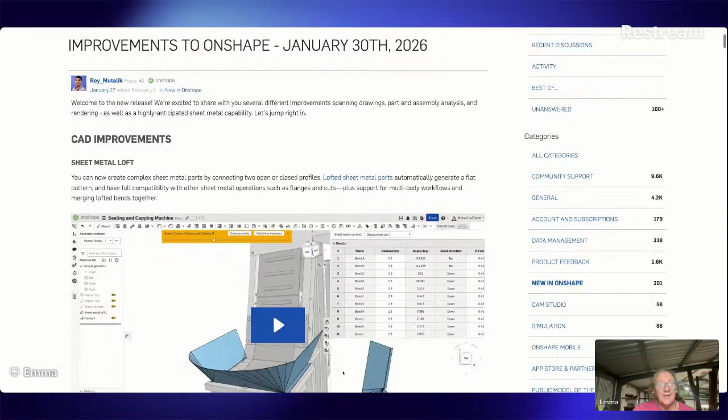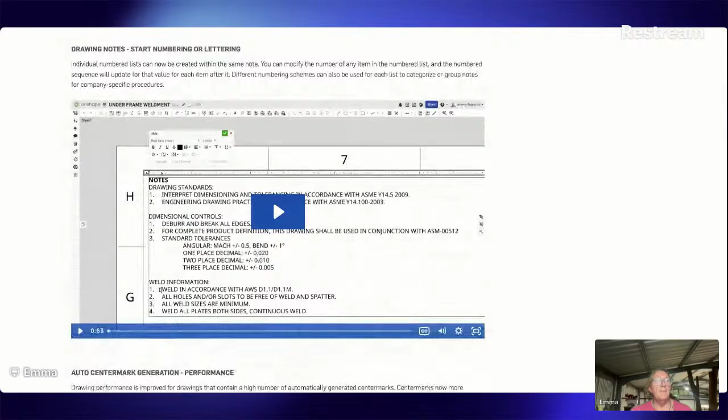Surface deviation with the deviation analysis tool. That's full paid, as is reflection analysis. Some graphics preferences. Touch input for a touch screen. Is your new screen a touch screen, James? Numbered lists in notes. Onshape for government. Render studio improvements is huge.

At some point, I'd like to get to the point that I can actually afford a full subscription for a little while, and try mess with some of these things, rendering, etc. Someone says, blinded by sheet metal loft, failed to see touch input on devices like a Surface tablet. That's exactly right.

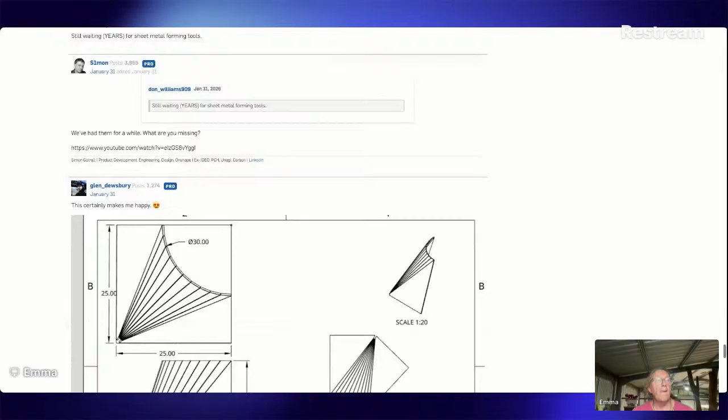But absolutely lofted sheet metal is a big one. So that's a big one that's been asked for a long time. We'll have a look at that. Might have a bit of a mess. What else is happening? Anyway.

Let's go back to Onshape. Here we are. Now, I've been messing, as you know, with the donation box pretty heavy. I'm going to do some more of that. I've got some ideas. I don't know whether I'm going to get into that tonight or not. Some of these projects were getting finished, which is great. Steve's Marshall big ends, they're on the bench there out the door. This part here for Phil's Portable really needs some work. Williams Lane engine is sort of starting to come together. That's something that we're going to be working on a bit more in the future.

This low angle jack plane, we're going to see a bit more of that too. I'm not sure about the Bolton number 12 beam engine or the Muncaster vertical. I will get in and do some more on them at some point. It hasn't happened. And projects for 1919 keep going. Mark's rod guides are finished and delivered. I think they came up pretty nice. So I can't wait to see them machined and in place. It'd be really good.

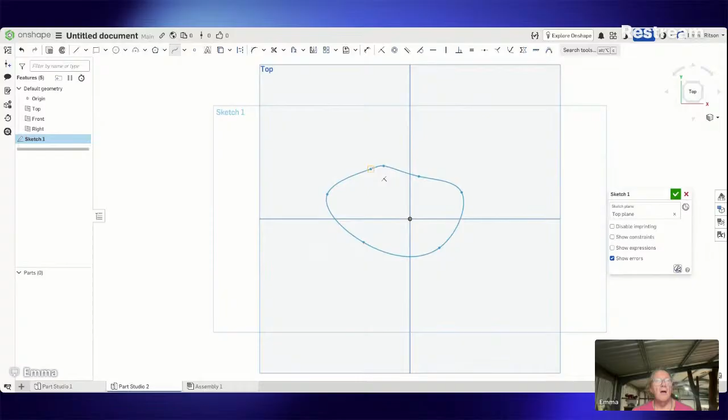On this top, we're going to make a shape. A sketch on here. Let's do something a bit fancy. We'll have a look at this sheet metal loft. Let's try with a spline. So we've got a shape like that. If we finalise that sketch, the easiest way is probably to put an offset plane to this one that we've just drawn on. We'll make this 100 mil. We'll offset it down rather than up. How's that? We've got another plane there like that, see?

If we do a sketch on this plane, and then we press N for normal, we can do something similar. Let's make it something fun.

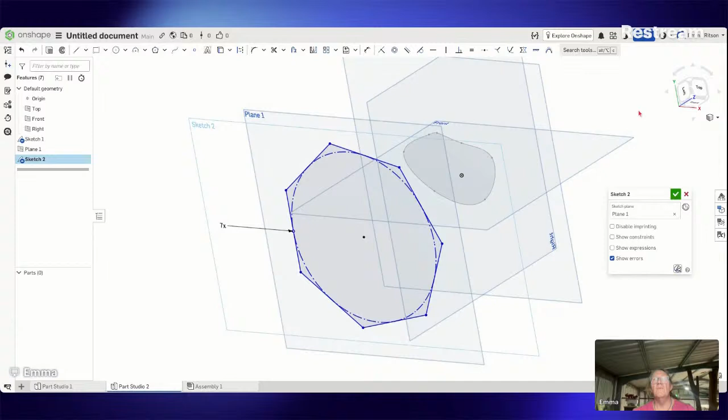Seven sides. Let's try out the sheet metal loft and see if we can loft this up. If we click and finalize that, we've got 2 sketches, one here and one here, all different shapes. Let's have a play with that. We're going to use this one here, which is loft, new solid, this one and this one.

And what we've got is a lofted design like this. So that's how you would make a... All that's done is put a pattern between one and the other and filled it in. Now, if we go and make a sheet metal model, let's try this out. Parts and surfaces to convert. Faces to exclude.

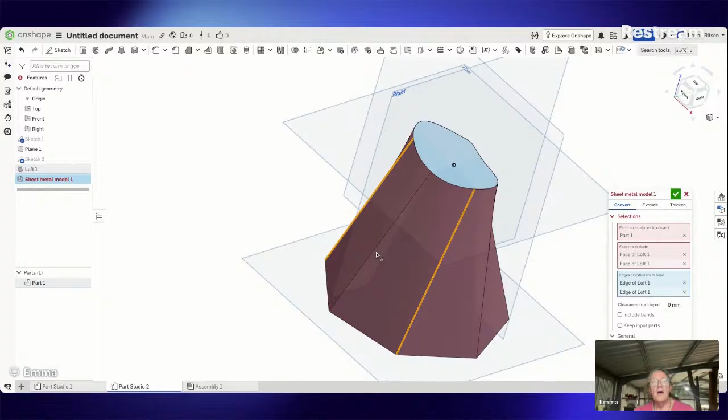Edges or cylinders to bend. See if it will actually do this or what's involved in actually making it work. It doesn't like the fancy shape. That's fair enough. Let's move back here and change sketch 1. We'll do something a bit simpler. We'll start with something like this, eh? I'll try that.

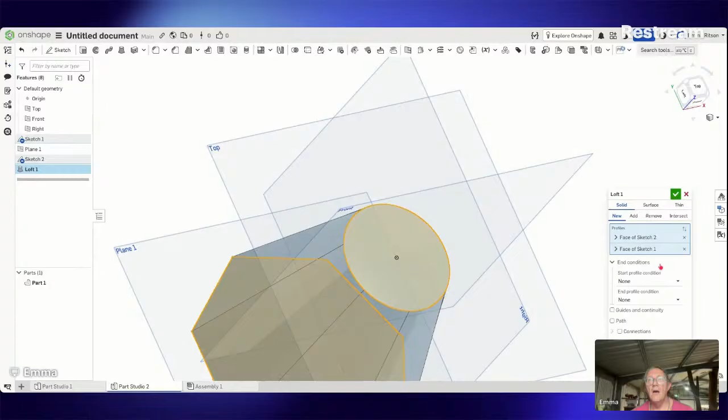We'll delete that. We've got the 2 there. We can loft that again. Right, something a bit more simple. Let's try this. Now we make a sheet metal model. Parts to convert. Faces to exclude is that one. And that one. Edges to bend. Only planar, cylindrical, conical, or extruded faces can be converted to sheet metal. Why is that having trouble with that?

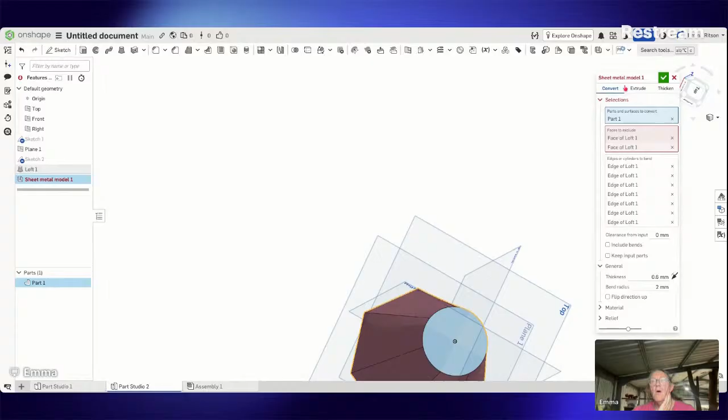Interesting. Yeah, we're going to go simpler again. Let's see if we can make this work. Otherwise, we might have to look it up. N for normal. Let's see if it does it this way. See how complicated it will get. I might have to do some research.

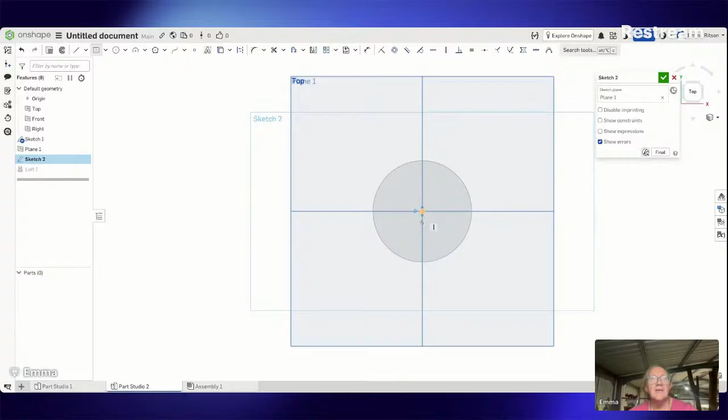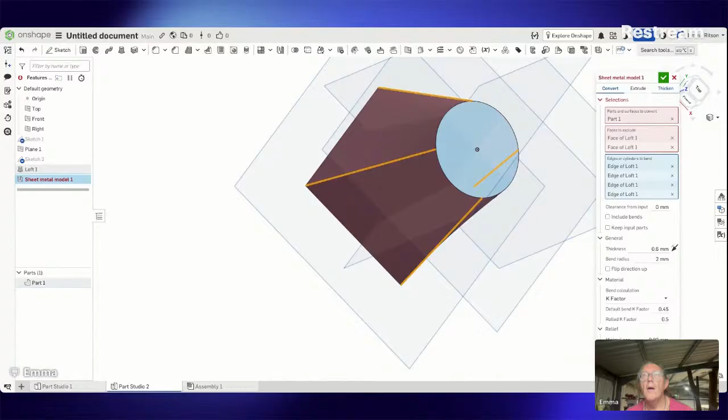Let's see if it'll loft between there and there. Struggling there. Delete that. Loft. Now let's try and see what it does. Interesting. If we're advertising this, there must be a better way to do this. Let's have a look.

Ah, there we go. So we've got that sorted. Interesting. Let's delete that. All too complicated. Let's see what we can do. Now, over here on this menu is a drop down. It says sheet metal loft. Look at that. If we select that, profile 1, profile 2. Profile 1.

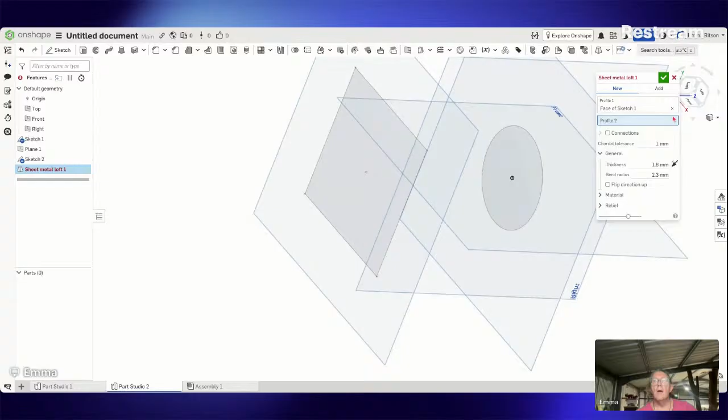And there we go. Look at that. It's a fairly ugly sort of loft there, but it seems to work. If we have a look here at the sheet metal tab, it gives us our flat view. So that does work. How cool is that?

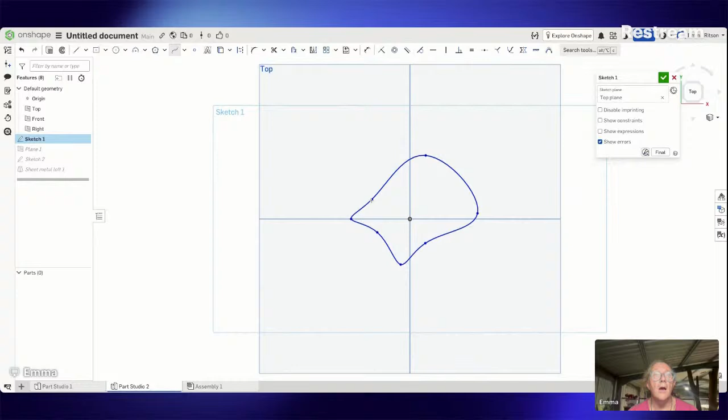Now we can come back here and sketch 1. Let's see how complicated we can go with it, now we know how to do it. Sometimes you just got to experiment till you find it. Let's try that. Yeah, it's going to let us do that. So that's pretty cool.

Let's make a wheelbarrow tray. Let's do it. Thickness 1.6. We'll try that. And there's our flat pattern. So let's use this for something practical, and delete some of this stuff. So looking at this, how big's a wheelbarrow? Sketch on here, on the top plane there.

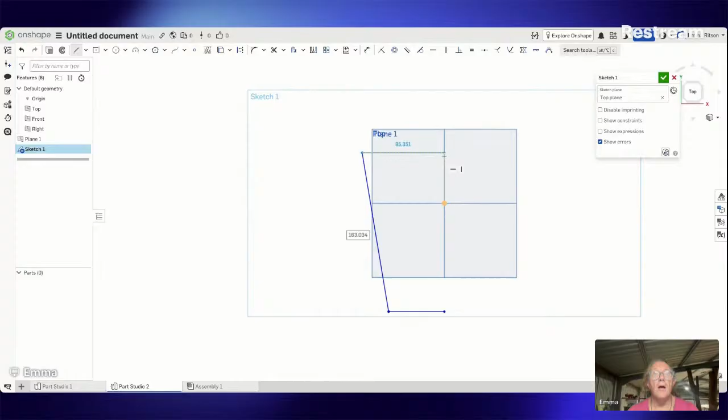We draw a line around there and then mirror it quickly across this line here. And then let's put a 3-point arc across here. Like so. And if we trim this one out of here, and we put a radius on the top corner here. Like so, and here. And probably here. And here.

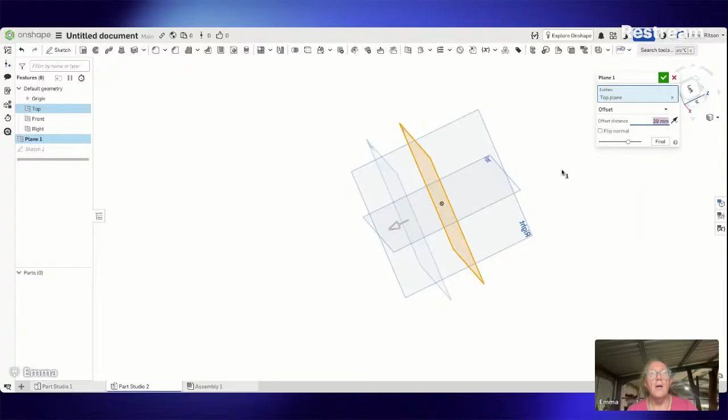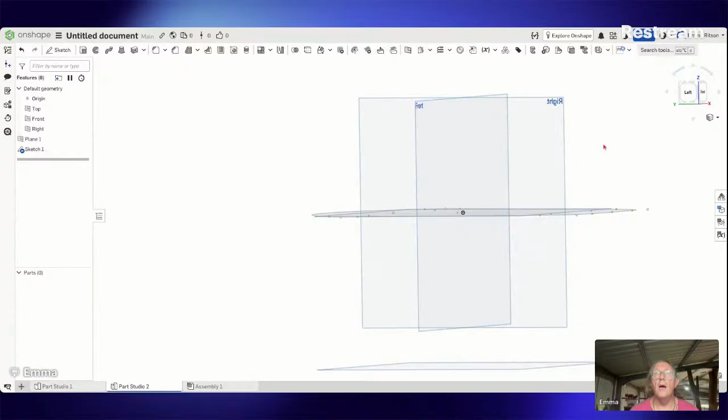I'm in that sort of mood tonight. Don't know how productive we're actually going to be.

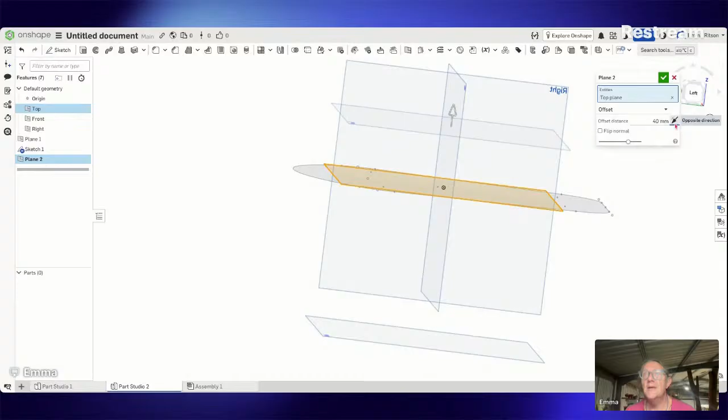Let's put a new plane in here. We don't want to offset it. We want to... that's not the right one. Let's start with offset. Something like that. Another one there. I think what we need to do actually, this is how we're going to do it. We go Control Z to get rid of that.

A new sketch on this plane. Go N for normal so it comes around. Press that and Q for a construction line. We'll put that on there. We've got a line sticking down there. Now, if we put a plane on that, we'll make that work. So a plane here. Line angle. So on this line.

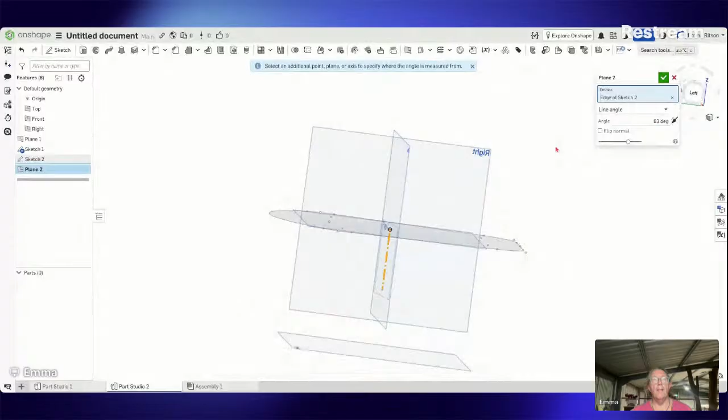That's how we do it. Close that. We'll finish this sketch 2, edit that, which is on this side plane. We're going to put this on an angle like this, something like this. I'm going to click that, and we're going to click the construction line. We're going to change this somehow. We're probably going to grab that and move that up. Move that up, something like that, so it looks about right.

And then we're going to put a plane on there. Plane on that line. Let's go line angle. Excellent. Now, if we put a sketch on here, on this plane, we press N for normal. And we put a line, something like this, a box, something like this. And then mirror it.

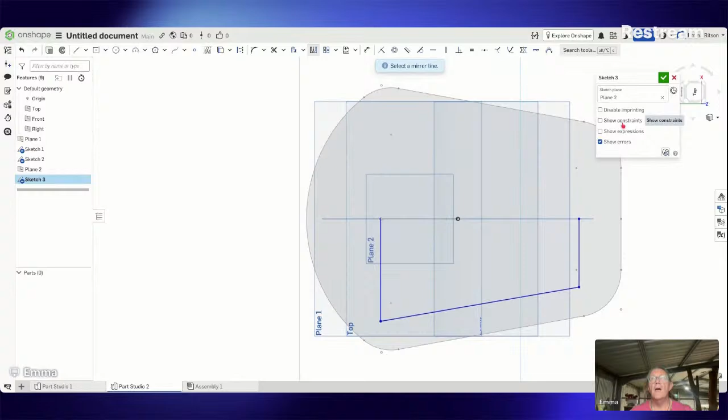We go to the mirror line, and then we mirror this one, this one, this one. We're going to put a radius on that. I think that's too much, but we'll click all 4 corners first. And we're going to call this 20. I reckon it's probably a good start. Move that for some reason, 20. Click that, and then we've got 2 here, something like this.

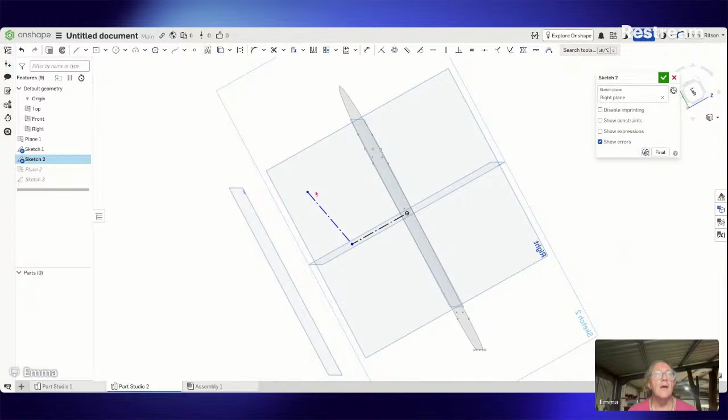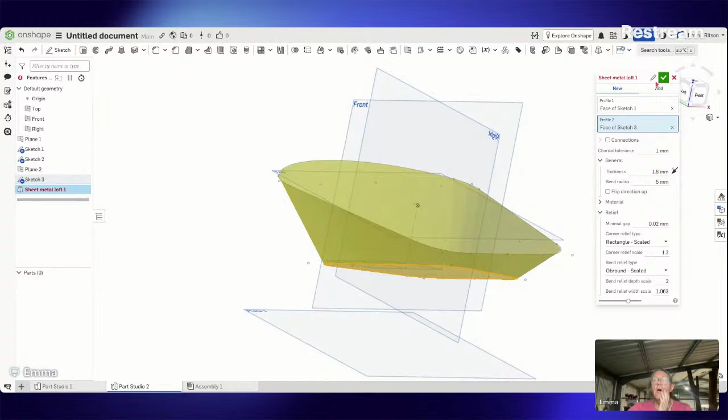Sketch 2, we can move a bit. Something like that. Now we're starting to look. Now let's try this. Sheet metal loft. Profile 1, profile 2. I can remember doing maths for these sort of drawings too. There's a collision in the model, which is there. Let's fix that. Did not generate properly. Sheet metal model cannot be built.

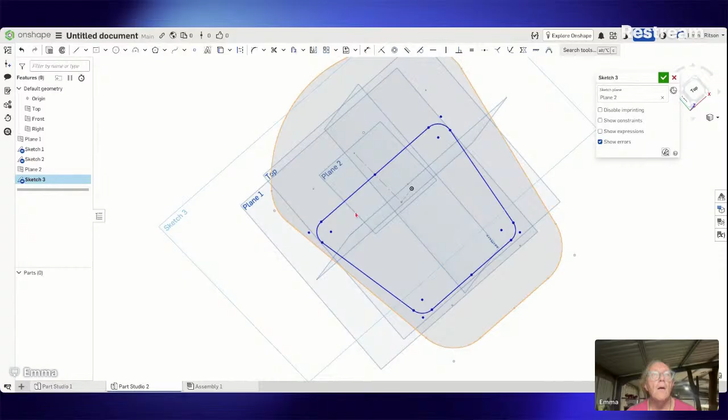Anyway, let's try again with sketch 3. I'm really a bit invested in this now. We'll edit that. Let's change this to a smaller radius. I think that could be some of the problem. 10. Move this out here. Move this in here. We'll go on the top so it's nicely balanced. That looks pretty good. Let's try again.

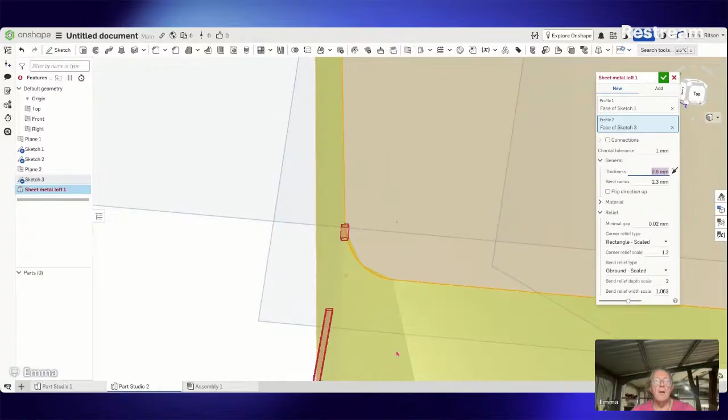So where's the problem there? The problem appears to be here. And why that's so. Let's change that. Let's fix that, I think. Chordal tolerance. 5 millimeters. Click that mode, got it. So, a bit limited, but that looks like it might work.

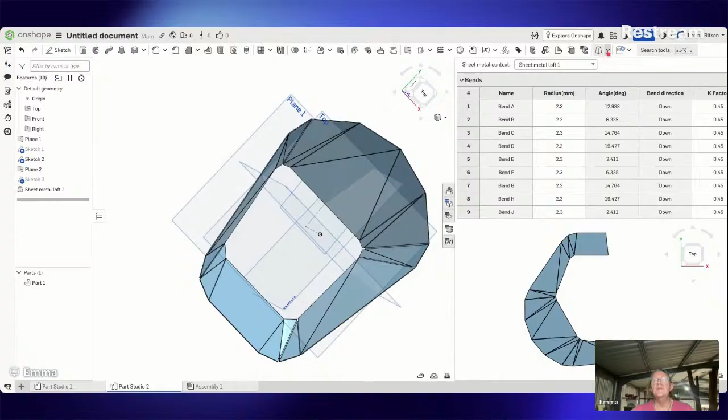If we cut that piece out and folded it up, you might end up with a wheelbarrow that looks something like that. Don't know if it's a particularly nice looking wheelbarrow. See if we can put an edge or a rolled edge or something on here. This is just a purely messing around sort of a job. Just for the fun of it. See if it can actually be done.

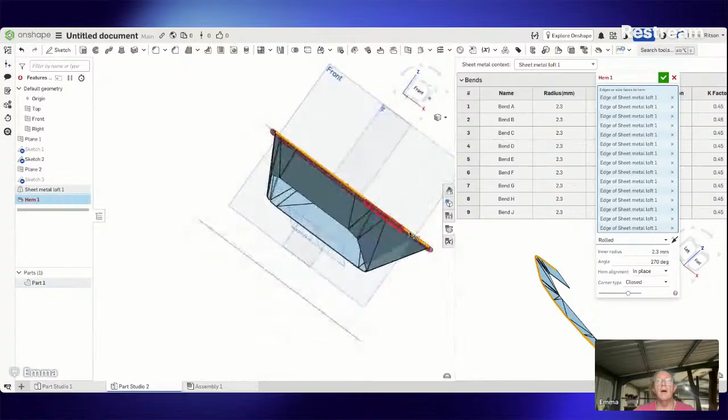Rolled edge. I'm struggling a bit with that. I'll flip it to the inside. I might have done that. So that's giving us a rolled edge. It's ugly. It's not a particularly nice wheelbarrow, and that's not really how wheelbarrows that shape are made. But it looks like it probably works. We could put some tabs on it and have something we could cut out and make a fairly usable wheelbarrow shape.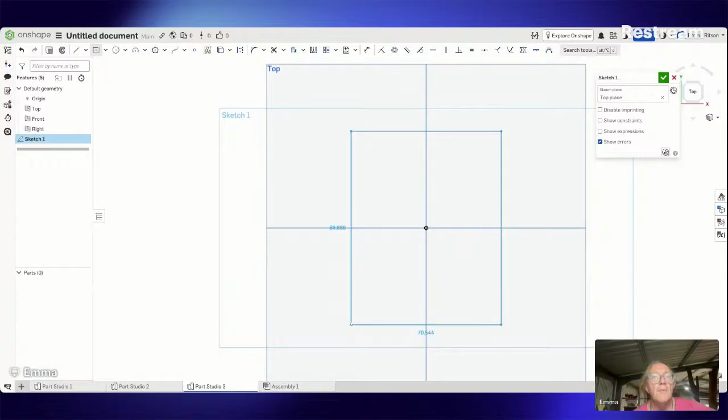In reality, wheelbarrows are more this shape. So I'm going to start a new part studio here and start again, I think. If we want to make a wheelbarrow like we've got here at the Shenandoah Steam Shed, we sketch on the top here, something that sort of shape and size. I haven't scaled this or anything. If we put another, probably do this just the same as we did before. If we go to the left side or the right side, might go to the right side.

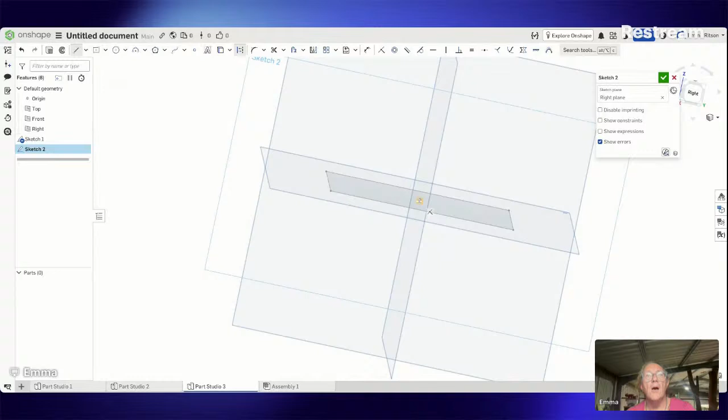Put a line there, press Q so it's a construction line. Don't want it on that plane, we want it on the right plane. And then the Q for construction line. Oh, come on, that's where we've gone wrong. We'll start another sketch. Sketch on that plane. And then we've got all this down.

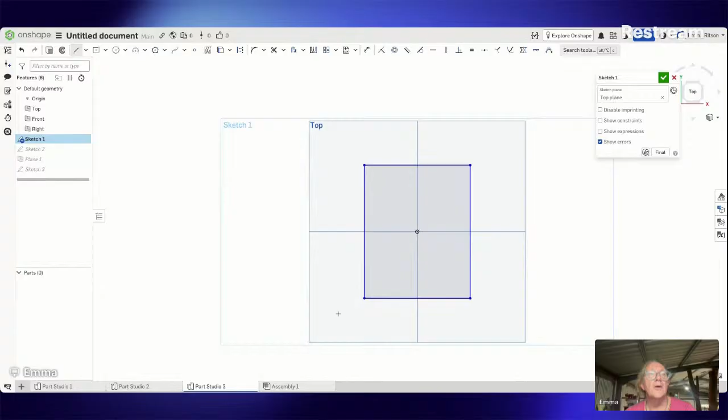Let's put a plane on that angle. And we get another sketch on that plane. Something like that. Sketch 1 can be modified a bit. Might do something a bit more fancy than that if we go out. Make the top that shape, eh? Only one thing wrong. Have to modify sketch 2 again. Try that.

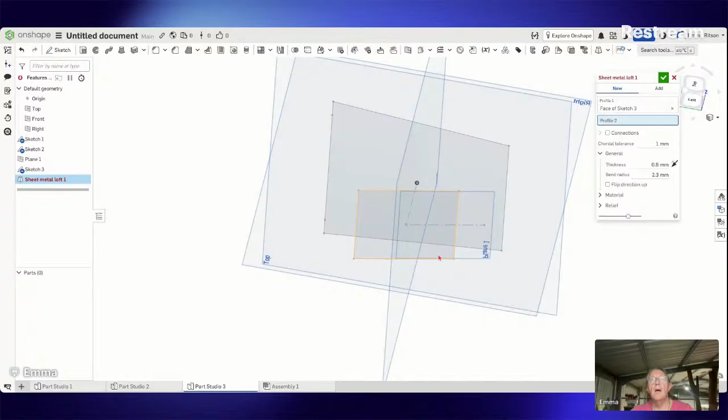So if we do this again, there's a collision in the sheet metal model apparently. I don't know. Interesting.

Something easier like a bent funnel, Peter says. Maybe.

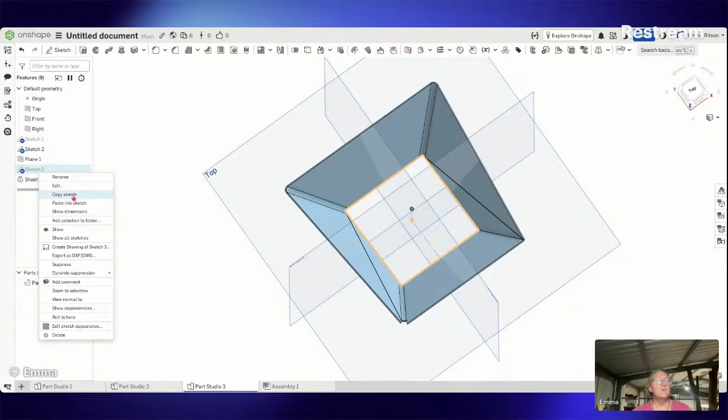Okay, if we flip it the other way, we don't have a problem. Don't know why that is. Anyway. It looks a bit chunky with those big corners, but it's only fairly small. If we put some measurements on sketch 3, we call this 350.

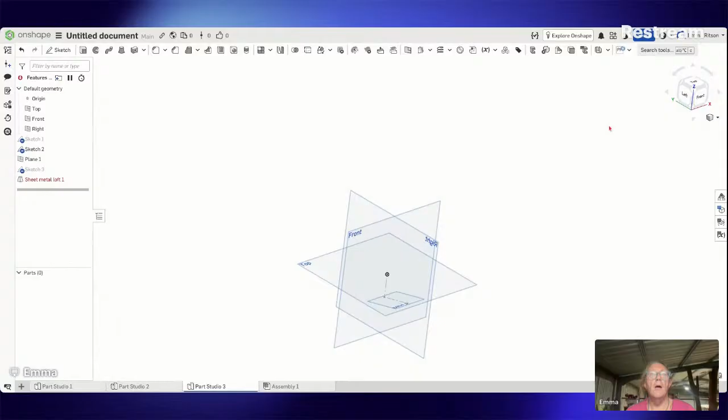Right, measurements on sketch 1. Call it 400. On sketch 2, we edit that and we put a measurement on this one, dimension on there, make it 220. Bit ugly, but we've got a wheelbarrow back. It's a lot ugly actually if we have a look.

If we have a look at our sheet metal model, there's the model for it. Now, interestingly, it hasn't shown the bottom. How do we make it so that we fold the bottom up, include the bottom of the wheelbarrow?

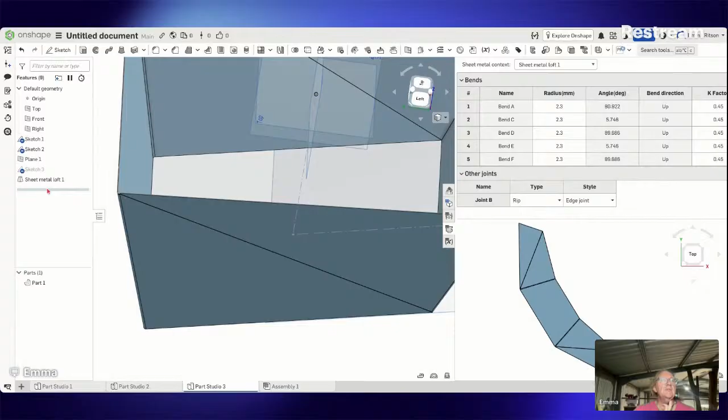Didn't work. So I haven't played with this as much as I could have, and this is all just a very fresh look at this. Now, I would think, if we look at this sheet metal loft, there must be a function. You would think that there would be a function. What's this, connections?

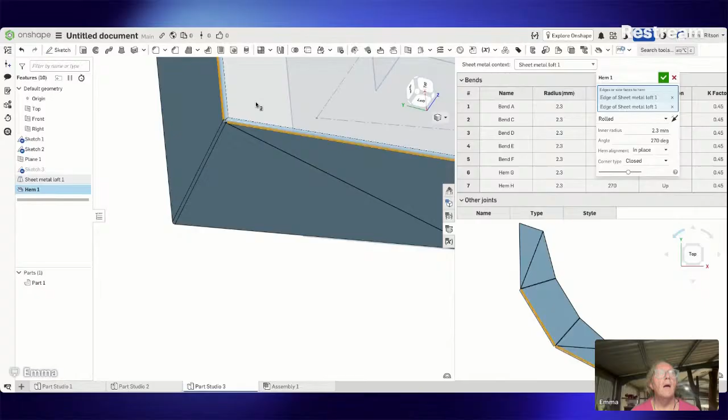That doesn't work. Let's close that. All right, I'm sure there's a way we can do that. What we could do is what we already did, put a hem on there. Come on, show us what we're doing here.

So angle 270, hem alignment. In place, corner type closed, is a rolled hem. Nice teardrop shaped hem. So let's go rolled hem in a radius 5 millimeters. Let's go 5 mil. It's a big roll. Let's call it 3. So let's put a roll edge on it. That's no worries. I think we can put some tabs on here at least.

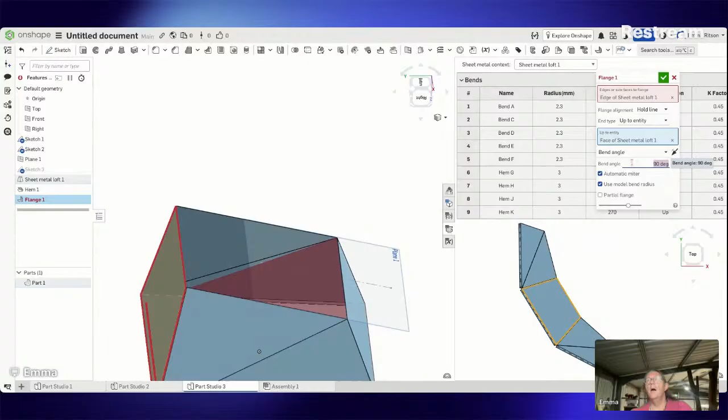Let's put a flange on here. So. I'm just guessing here the angle. That's not quite right, but if we go back here to sketch 3 and edit that, and we put a dimension on here.

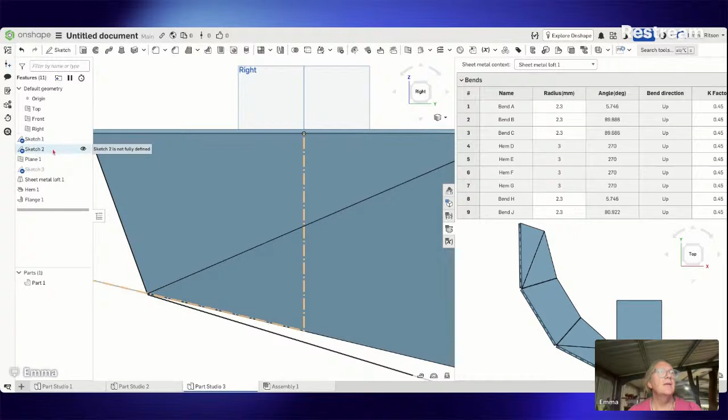Sketch 3 is the wrong sketch. That's why we're having trouble with that. Let's try sketch 2. No, go the other way. There we go. And wait for it. You could make an extra part for it. There you go.

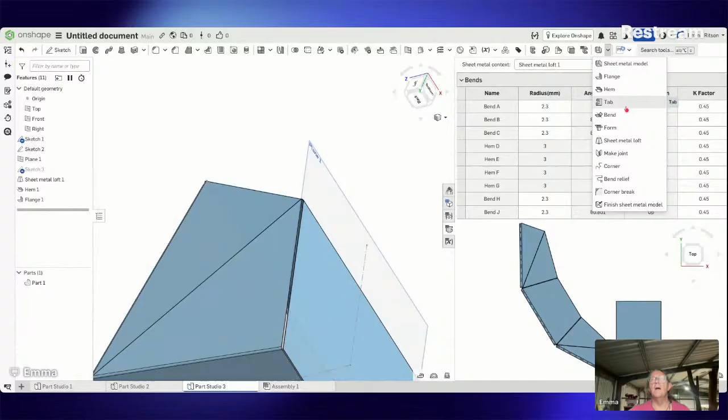So there's the base. Probably want to put a tab on that, do we? We've got to draw tab profiles on there to do that. That's a lot of messing around. Anyway, we know that works, so that's kind of useful. Could be very cool. Something we could actually use. What would be more useful? Use less tin, perhaps, if this sheet metal flange actually worked off this gap here. But we'll have a look at that.

Anyway, that's something we've had to play with. There's only one way to find out about stuff, and that's to get in and experiment with it. It's a really good sort of a thing to do, to find out how it works. I mean, what's the worst you can do? Muck up. It's delete and start again. We've done that. I think we can put a flange on that. What have we done?

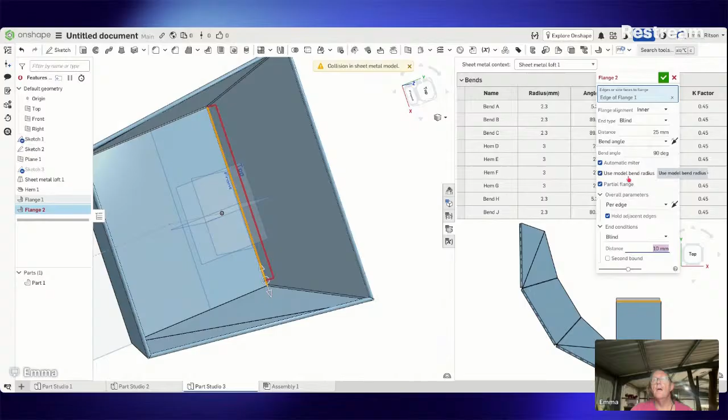And put a partial flange on there. What we've got is the wrong... It's the wrong... There we go. We fixed that. We can do a thing here called... interesting.

So that puts a flange on there. So we can spot weld that along the front, and probably if we put one the same along each side, then we'd have a wheelbarrow or something. Anyway, very cool. That's a feature that needs some messing around with, but it might actually work. Now, let's run an idea past people here and see what they think. We'll get back onto this donation box because this is quite a project.

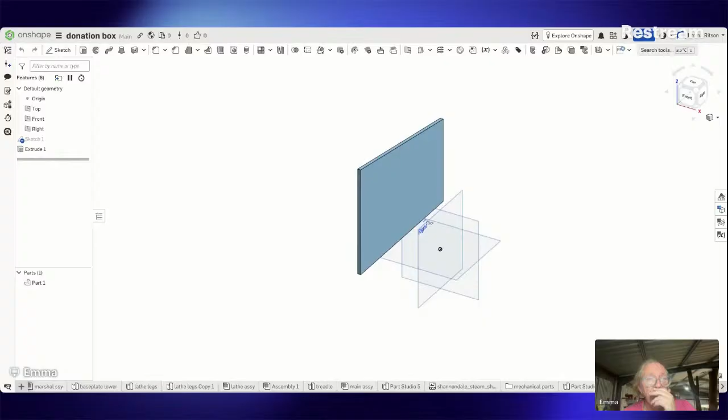What we've got, slowly coming together. Right. Well, we've got something like this. It looks nothing like this, actually, in reality. But what I would like to do, right, if we move this, turn that off, eh? Why have I got this in here? Something's not right. But anyway, what I'd like to do is put a false floor in here. Something like...

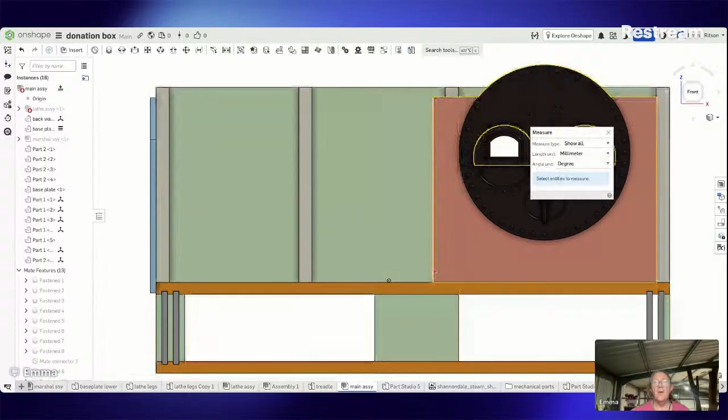Let's get rid of that. What I'd like to do is put a false floor that distance off the floor, if anyone can see that cursor. If we use the measure tool, we go between there and there. It's 290, roughly. Again, between that line there and that line there. It's not right. That line there, that line there. 280 by 290, something like that.

So if we draw, let's do this. We'll put new part studio. We'll call this one false floor. I'll call it flooring. On top here, if we draw a box, sketch this and draw this out pretty quick. 290 by 290, something like that. I don't think that's quite right. And if we extrude that out 3 mil thick,

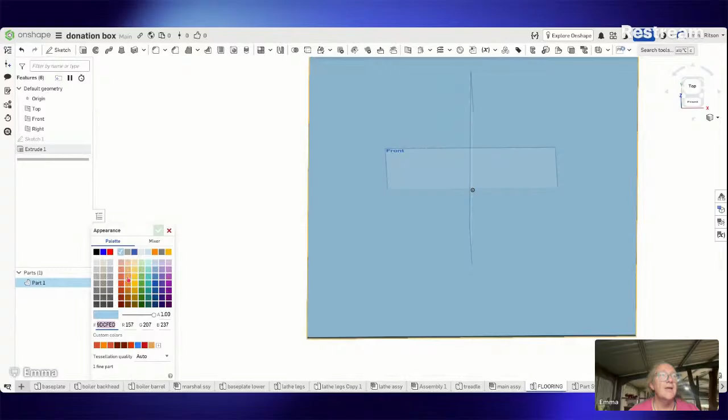let's edit appearance, make it sort of timber coloured, something like that. It's not timber coloured, but it'll do. If we go back here to the main assembly and insert that, flooring.

See, what I want to do is put a false floor in there like that. Something like that, right? On this side there's going to be pavers or cobblestones or something, we can work that out. But we're going to put wooden flooring joists under here. This might be a fraction high, let's go a fraction lower, but just for the purposes of it, something like that with wooden timbers underneath, so you can see in there.

Now the lathe and forge and everything else goes up on top. That's easy. But what I would like to have is another little animation in under here, and I've been giving this some thought. I don't know about CAD drawing this, but here's some thoughts.

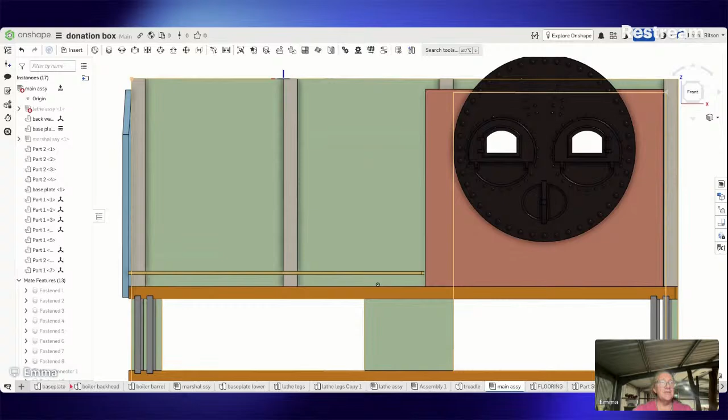If we had 3 turn drums, right? Let's just do this. Where's flooring? Here we go, we'll make a sketch on here, on the edge there. Wrong one, we'll change this to a corner rectangle. 7 by 12, something like that.

And we do a linear array for that, and we make them 80 apart. And we put 4 in. Finalize that, then we can use our transform tool. Drag this one, drag that back this way a bit. Something like that.

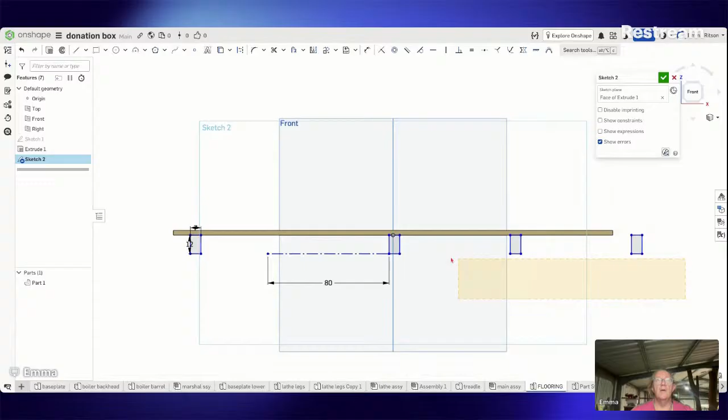And that doesn't work. So let's do it again. This is not in any way meant to be instructional, guys. I'm just here for the messing around, and I appreciate you being here too.

If we transform, it's not the right one. Linear pattern, that one. Would we say 80? Something like that, looks about right. And 4 of them, that's done that. If we extrude them the other way, that'll probably do. Right, we end up with that.

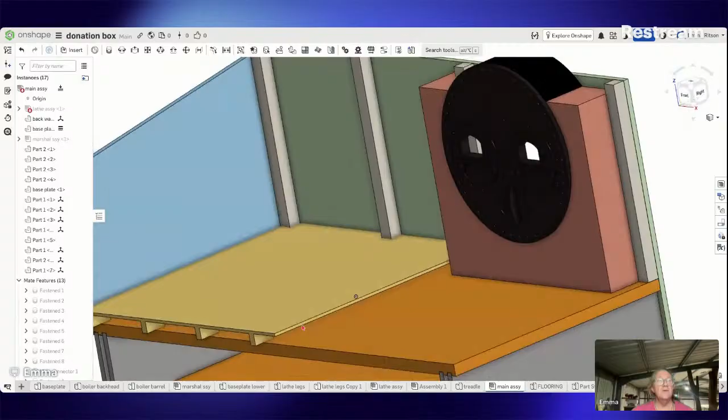Now we'll have another look here at the main assembly, and that's sort of what we had in mind, something like that. These will probably go quite a lot of the distance through. This actually sticks out the front of it, but it's not going to matter much. Probably it's not the only thing that sticks out the front if we have a look. Yeah, not well designed, but it sort of works.

Now my thoughts are, if we look at this from the front, right, for one we've got to get some light in there, which is a bit of a problem. But if we had 3 wheels in here, right, 1, 2, 3, something like this.

Now, because we're going to make this an actual feature or part, we might as well get organized and make a folder here that says flooring. I'm going to call that flooring. We can just drag and drop that into the flooring folder. We can open that and it's there. We can create a part studio. We can rename that and call it snake body.

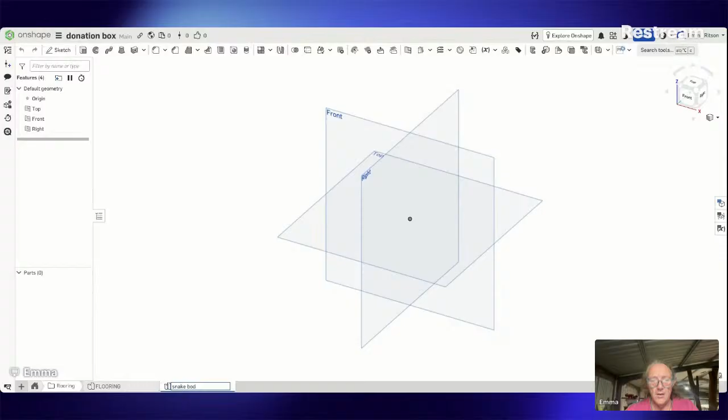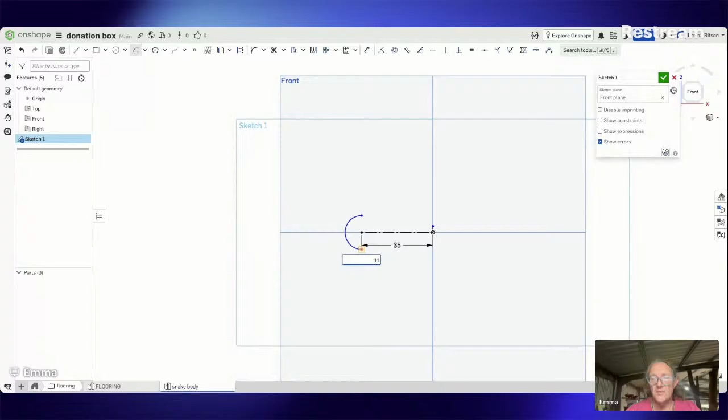We draw a circle, make something sort of this shape. You'll see when it comes together. I'm a bit sort of scratchy tonight. Sorry, guys.

Move it out there. We use the extend tool or the X tool. We stretch that around and make that match on there like that. And then we want to use the trim tool, which is M. Trim that. And then a line down here like this.

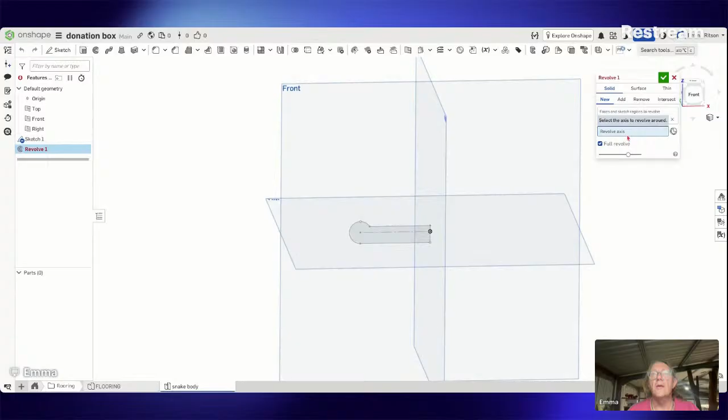This is very rough, but if we revolve this on that axis of that line, right, if we paint this, add appearance to this face here, nice green, something like that, right? And made wheels like that.

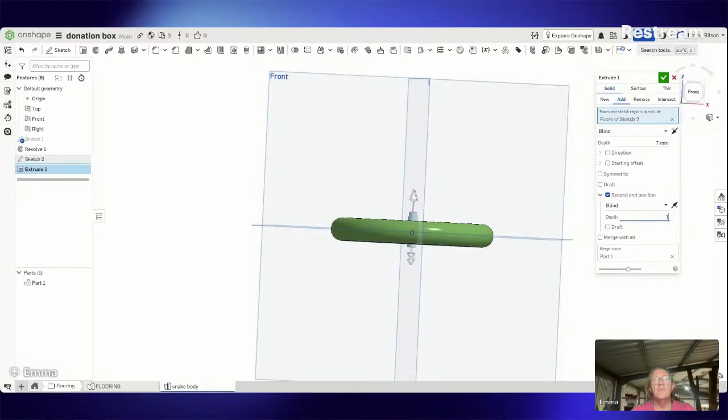Now bear with me. If I put this, or we make it, let's make an assembly here by way of getting complicated. We'll call this one a flooring assembly. And we'll insert in this the flooring and do it this way. This is what I've got in mind. I don't know if this is going to work.

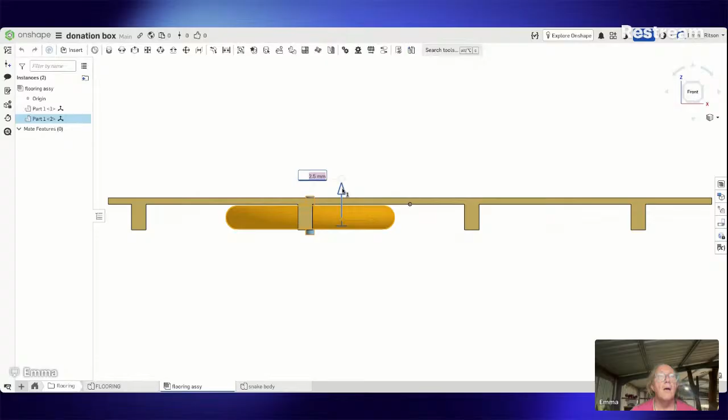But this is the thoughts for a snake, right? We'll put this behind here. And then we insert another one. Bear with me. And another one.

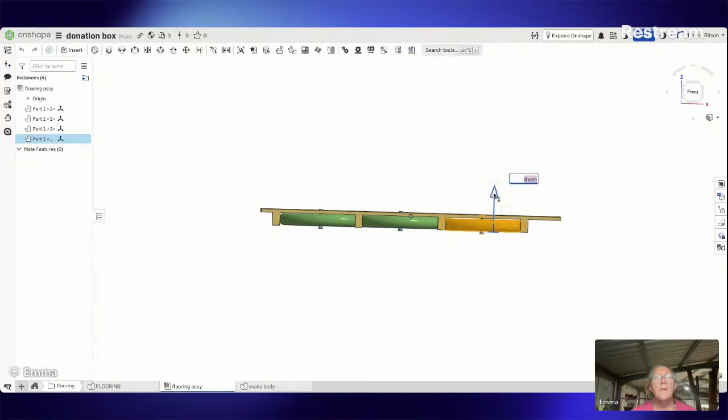We look at the bottom here and we line all these up so that this one here goes here somewhere, and this one here goes here somewhere. Right, and then we do the whole thing like so. Now, for a start, this is very basic.

But if we put pulleys on these, with a belt around them, so they all turned - I don't know whether they want pulleys or gears, I don't know which way they want to turn without experimenting with it - but you would see the pattern on the snake move that way, and then that way in a coil, and then that way in a coil, wouldn't you? And you'd think that there was something moving under there. Does that make any sense?

Right? Now, we could build under here somewhere. Let's move these back, back a bit further anyway. I don't know how far back. Right, it still looks the same, no matter where you move. This one here wants to go. So you can't actually see the coil, I think, something like that.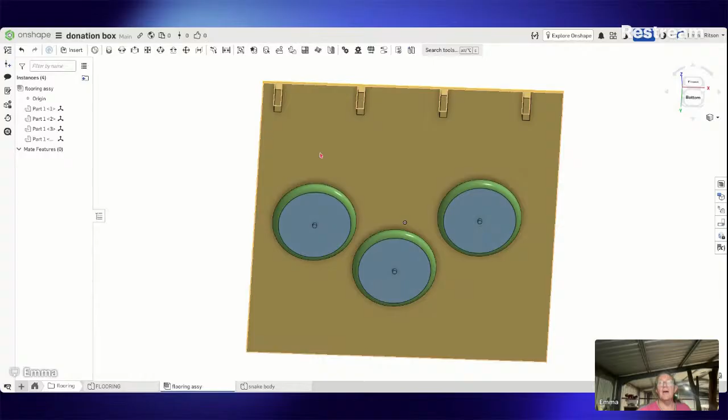Right. Now, we can make here a snake's head that ducks in and out on some sort of a cam or a, right. And we can make another wheel, something like this. So if we make another part studio,

we call that rat. And we sketch on this top plane again and make a circle like something like this. And we extrude that. We'll make it, what, 0.6 millimeters thick, something like that.

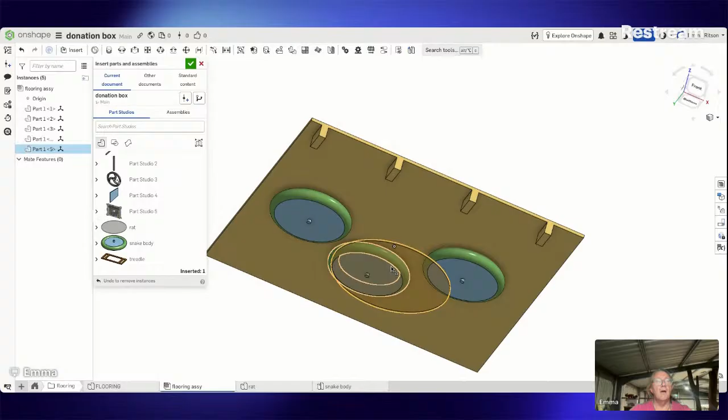And we edit the appearance, so we make it sort of that color. And we can fade this back so it's transparent. Right? And then if we make it, go back here to the flooring and insert that part - find it's nowhere near big enough.

Somehow, we go back here to this and alter that sketch. Just put a measurement on that. That's easy.

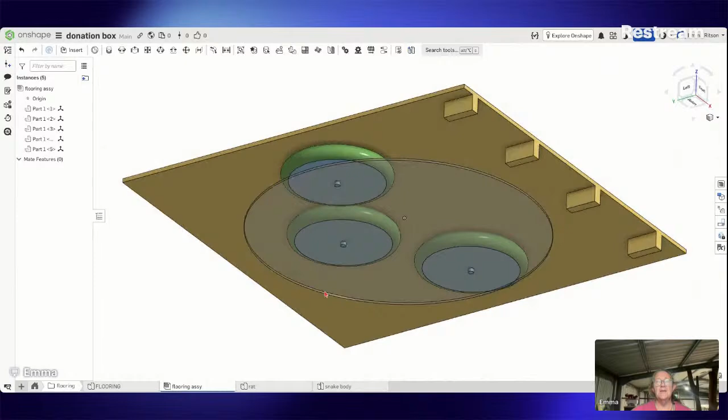Come back to the flooring. What we would have here, if you made a recess in the piece that we've already got in the floor for this circle, we could probably run a little rat around the outside so it runs around the outside and disappears through these flooring here, you see? Disappears out here somewhere. And if we block this one off, then we'll put this round the back so our little rat that's on this disc that was spinning or turned was round the back out of sight.

When you actuated the mechanism, we can make it so this does one complete turn and runs past, and have a snake's head here that clicks around and looks at it and follows it past while all this is moving under here. Are we following? Does that sound complicated? Is that doable? Is that something that would work? There we go. That's where I'm at with that. Are you following?

The couple of things I guess that I would have problems with this movement and mechanism, I think, is lighting - getting actual light in there. I don't really want to put battery lights or anything like that so that you can see things. I think that's a bit overkill and complicated and something we don't really want to deal with, and a bit of technology I don't like. All right, so that wouldn't work.

If we could have a hole in the back and a mirror, something like that, would be really good. If we could put a little mirror here in the corner and a hole down the back - a little mirror here in the corner, like so forth, across here, and a hole down the back so that the light shines in, and then that lights up across there. That might be really good.

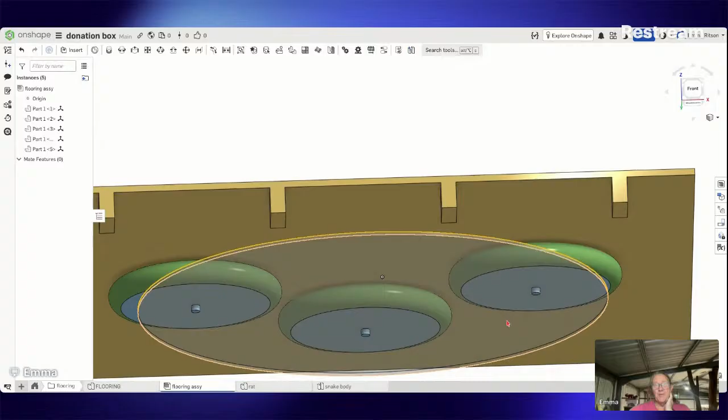See, the other problem is that here, you've got this gap in the middle that this relies on the pivot. So all this metal, all this plastic, or whatever you want to put in the middle here that spins, the operation for the lathe and everything else has got to come through it. So that means it makes it very difficult to make it spin. That's not going to work.

So my thought process at this point is probably, instead of this, to have a pulley here and a pulley here, and probably a pulley here or something like that, or a tooth pulley, and a rubber belt around them.

Getting that out of sight is a bit more difficult. But if you did that and attached a little polymer clay rat to it, then it improves it on several levels.

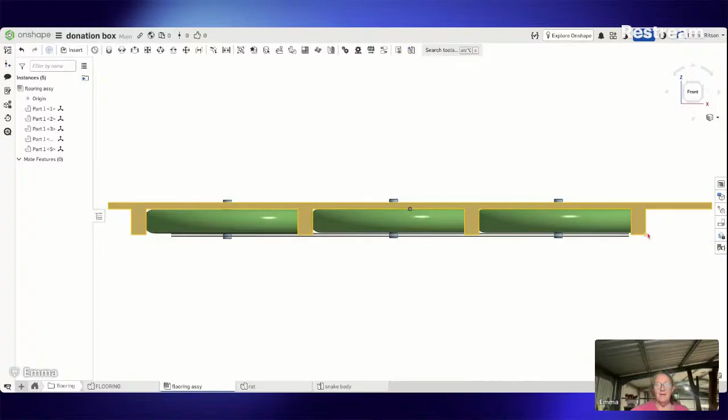One is that it takes a route that looks good across the front. So instead of coming out here and going back, it just goes straight across the front, which is great, or on a bit of an angle back. All right, that works.

The second thing is that you've got a certain number of turns here on the pulley to make this rat travel from wherever it is here and do a complete circle back to where it is. A belted track probably sort of works, but it's a bit boring.

So we can work that into the mechanism if we had like a wind-up spring and a ratchet, or a wind-up spring and a pawl, or a detent, so that what happens is that you wind the handle and wind the handle and wind the handle, and the spring winds up, and then something trips it, and the rat races past and does a turn.

And the other movement does the 2 or 3 turns to make it all work. And then once the rat's out of sight, you keep winding the handle, it picks up a detent and moves the snake back to where it was when the rat or the mouse is actually gone.

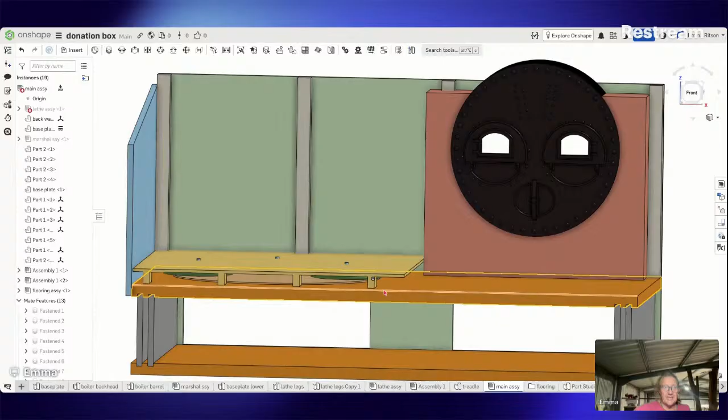Now, this belt needs to be down inside this base here. So whether you route a track in here, make a template and route out a track and route out the mounting holes and mount the pulleys in here and make the shafts come up through the floor here in places so that they're hidden, that's something you could probably do.

Or, if you listen carefully, you can probably hear the fuses blowing in my brain. Do we straighten all this up a bit?

I've been trying to explain this to people for a while, and this is probably the best way I can think of to actually do it. Is through CAD.

So that would give us a pretty convincing snake. This one here doesn't need to be this big, like it doesn't have to follow out here like this, probably. And if we had a head sticking around here, I think that would actually work.

A couple of little bits of mirror. I honestly think that that might work. If you painted a texture on these or a pattern on these for a snake, like a carpet snake, so I think the mechanism, or the actuating mechanism, is probably quite simple. Quite simple to make it work effectively.

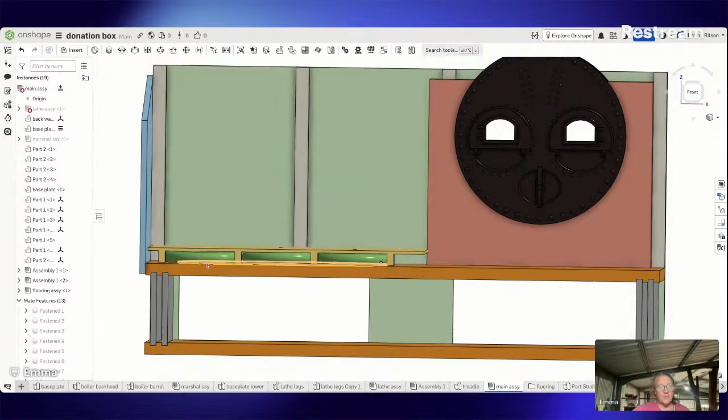If you made the snake's head move from here, sort of across here, where my cursor is, if you made it crawl across here, while all this was moving, after the rat had disappeared out, he'd come out here and disappeared into there.

Interpretive dance is probably really good. Therapy.

And whether you had that on another wheel or another balance so that it turned at the same rate as the rest, or whether you just had something that, like on a lever with a rack, so that a gear would move that, I don't know. You would have to put some of these wheels and bits and pieces in place and then start messing around with the mechanism so that it works. I don't think it'd be all that complicated though.

So that's where I'm at. It's 9 o'clock already. You've listened to me waffle for an hour and a half and probably for an hour about this. But that's what's going in my head. That might be what's going to happen. The actual fabrication of this thing is probably a bit more complicated. If I could call in a favour and get one of the wood turners I know to actually make some snake rings, it'd be really good.

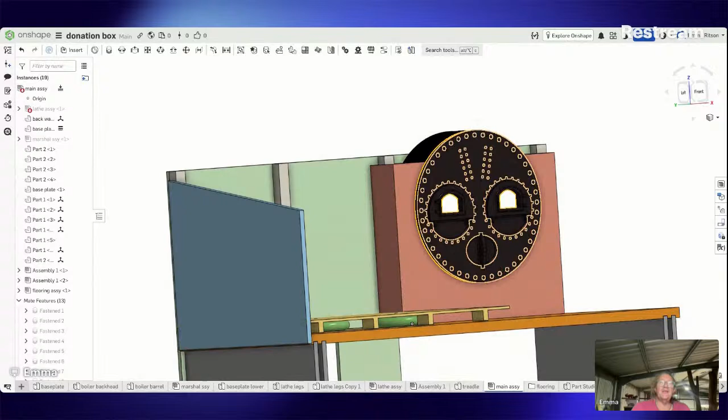Am I going to factor in a way for maintenance? Yes, I believe so. This top comes off, and I guess this will just screw on. So you should be able to remove this top. It's not glued in place, this sheet here, and all this is attached to that sheet. So we should be able to just unscrew this top, right? Turn it upside down, unscrew this out of here, and we've got all the bits. So that's not even the slightest problem. It's a very good idea.

Thing we've got to be a bit careful with is that when you look at this line from this angle, there's a gap here. So I think we need to close them up a bit more than that. If we go back here to, or let's, oops, what happened there?

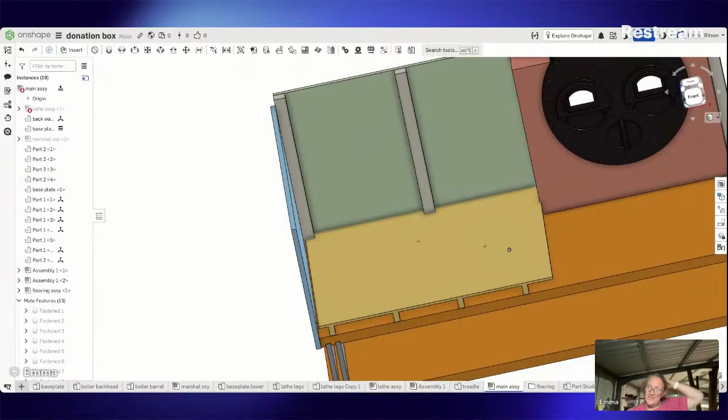It's like Minecraft. Yeah, it's more fun than Minecraft because it's actually in real bits.

If we turn that off, then we would have there was some overlap, so that when you looked at it from this angle or this angle, you could see the three rings, but you can't actually see through them. There will probably be an angle where you will be able to see through them, but if there's overlap enough, you won't. Maybe. So that's something to think about.

And I think probably a lever around here with a snake's head on it and some sort of a rack system. But I'm going to ditch this wheel, I think, for a rack. I don't think that's the answer. I think probably I'm going to put a pulley here somewhere where the cursor is. So you can't see that, but there's a cursor there in the middle, and back this way where the cursor is, and probably 4 spots, something like that. And they might not be exactly 4 spots, but if we could keep the belt or something down pretty low,